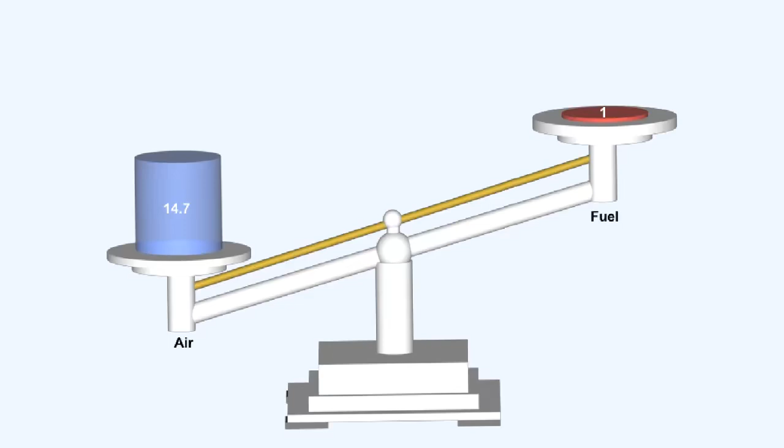This ratio is termed the stoichiometric or chemically correct ratio. At this ratio, all of the oxygen in the charge combines with all of the hydrogen and carbon during combustion. For the purposes of this lesson, we'll restrict our numerical definition of the chemically correct ratio to two significant figures. Thus, we'll specify 15:1 as the chemically correct ratio for air and gasoline.

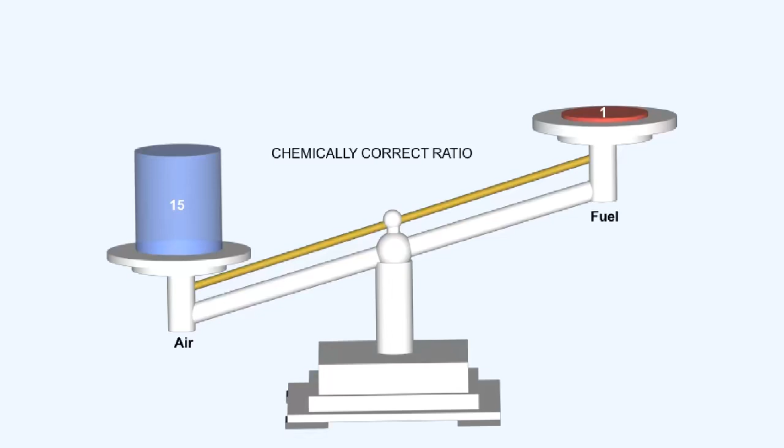It's important to remember that the chemically correct mixture does not give the best results in a piston engine, because the temperature of combustion is so high at this ratio that power can be lost through detonation.

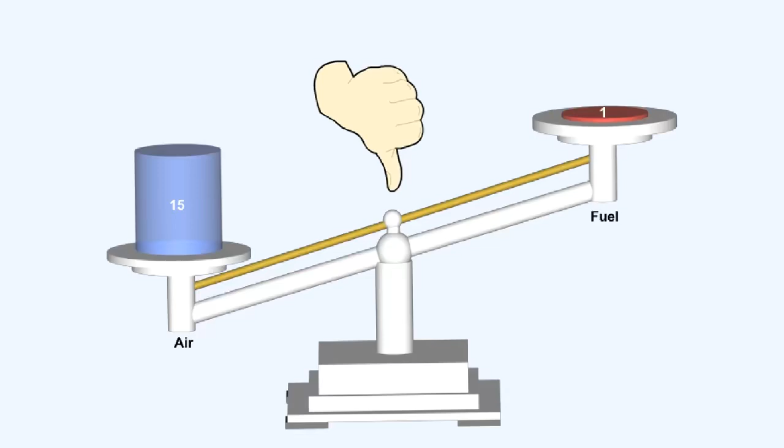In practice, particularly in a carburetor induction system, mixing of the air and fuel particles and their distribution is less than perfect. This results in some parts of the induction system having a richer mixture and others having a weaker mixture than the optimum strength.

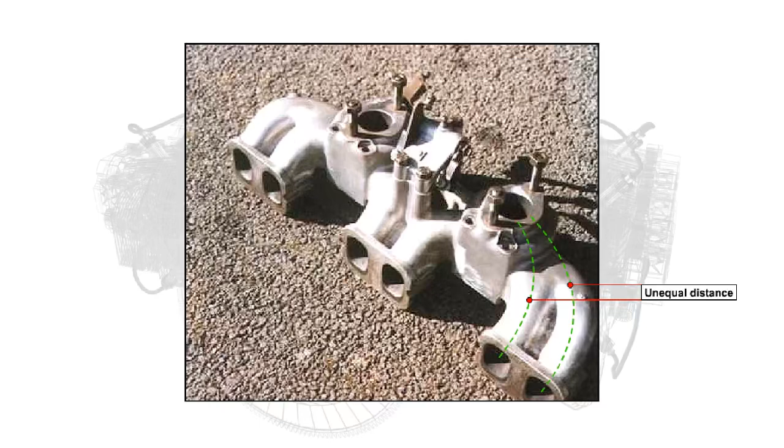This variation in mixture strength may even exist between one cylinder and another adjacent to it, as is evident in this example of a simple automotive twin carburetor induction system, where the difference in the distance that the air-fuel stream has to travel between the carburetor and, say, the number 1 and number 2 cylinders will have a quantifiable effect on performance.

Having a slightly rich mixture does not have much effect on power, since all of the oxygen is still consumed and the excess of fuel merely serves to slightly reduce the effective volumetric efficiency of the engine. In fact, the cooling effect of the evaporating fuel can to some extent be beneficial in cooling the charge temperature below the level where it might otherwise detonate.

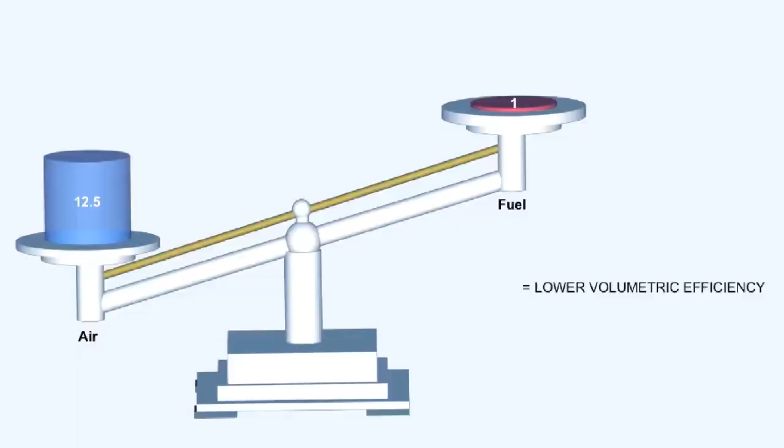Running the engine on a weak mixture, however, rapidly reduces power, since some of the inspired oxygen is not being utilized. The power reduction thus suffered is much greater than that which results from a slight richness of mixture.

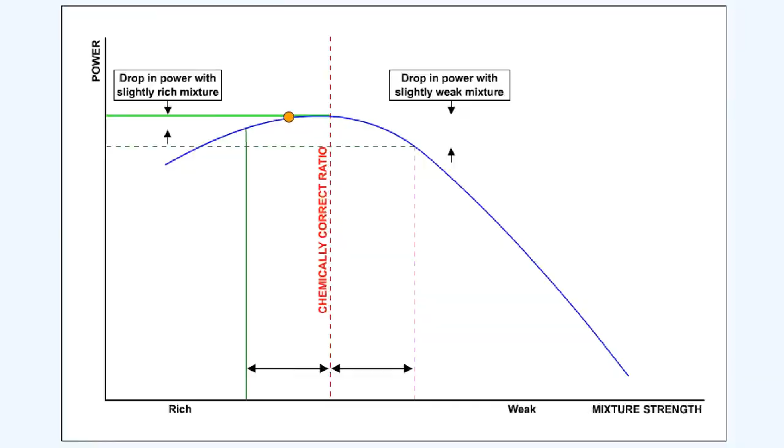It is, therefore, quite common to run aircraft engines which are fitted with carburetors, when maximum power rather than best fuel economy is the objective, at somewhat richer than the chemically correct mixture, for example about 12.5:1, to ensure that no cylinder is left running at severely reduced power from being unduly weak.

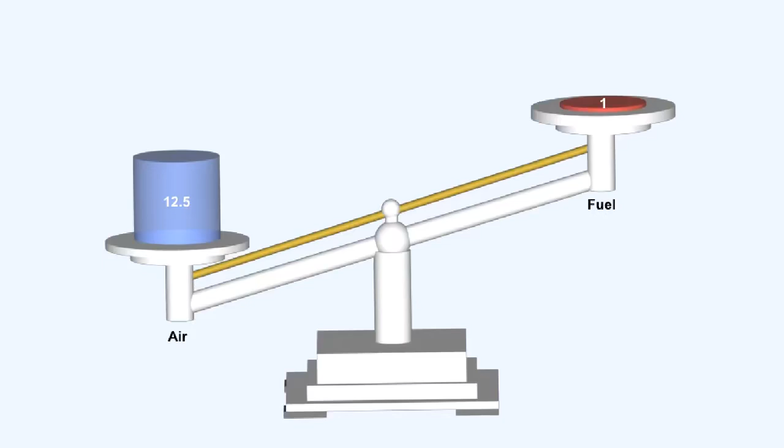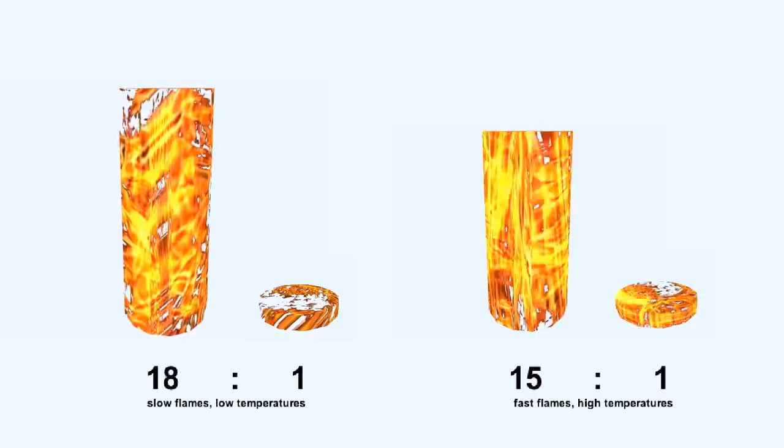A mixture which is weaker than the chemically correct ratio, besides burning at a lower temperature than that which would occur with the chemically correct ratio, also burns at a slower rate than the chemically correct ratio, because of the greater proportion of nitrogen in the cylinder.

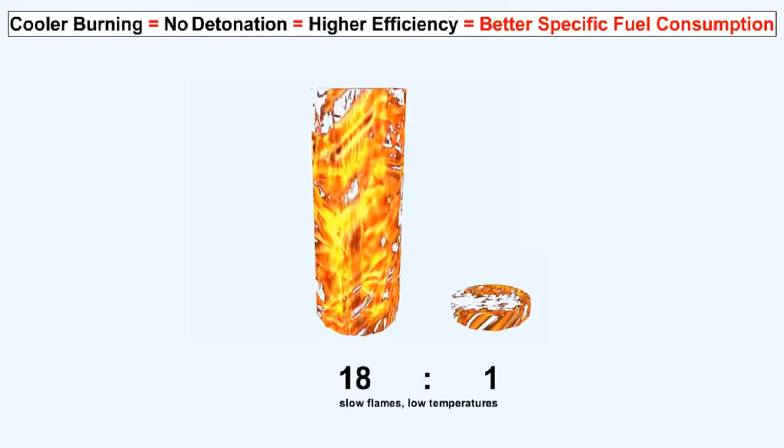Power output thus decreases as the mixture is weakened, but because of the increase in efficiency which results from cooler burning, and the associated decreased occurrence of detonation, the fall in power is proportionally less than the decrease in fuel consumption. Thus, the specific fuel consumption decreases as the mixture strength is weakened below 15:1.

For economical cruising at moderate power, air-fuel ratios of 18:1 may be used, an advance in the ignition timing being necessary to allow for the slower rate of combustion.

The current number of modern aircraft with the facility to vary the ignition timing in flight is limited. However, following the recent introduction of electronic engine control, a rise in this number is likely.

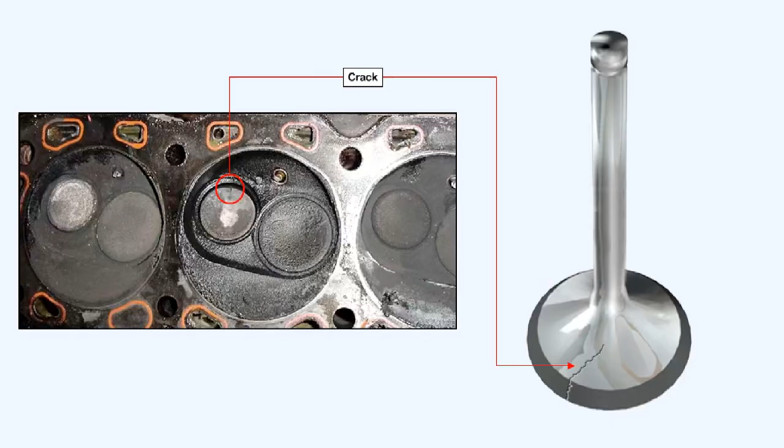With extremely weak mixtures, the gases may still be burning when the exhaust valve opens, exposing the valve to high temperatures which may cause the valve to crack or distort.

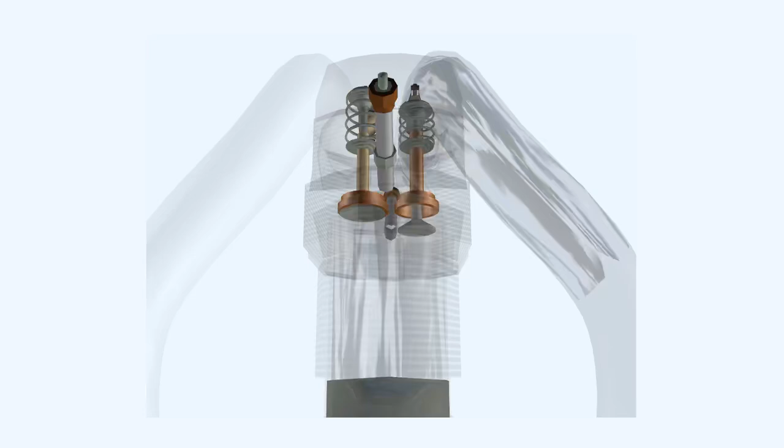As the inlet valve opens, the heat of the exhaust gases remaining in the cylinder may still be so high that it could ignite the mixture in the induction system, and popping back occurs through the induction manifold.

This slow burning also causes overheating, because a certain amount of the heat generated in combustion is not converted into work by expanding the gases in the cylinder as it should be. It therefore remains in the cylinder and has to be dissipated by the cooling system.

The first reason concerns the fact that fuel will only burn when it's vaporized and is mixed with air. When first starting, the engine will be cold, and there is little heat to assist the vaporizing process. Therefore, only the lightest fractions of the fuel will vaporize. To make sure that there is sufficient fuel vapor in the cylinders to support combustion, a rich mixture is therefore required.

The second reason concerns valve timing. As we've already learnt, the exhaust valve timing is given a certain amount of lag, so that full advantage can be taken of the considerable inertia of the gases at normal engine speeds to obtain efficient scavenging of the burnt gases, and to give impetus to the incoming charge. However, as engine speed reduces, the gas velocity falls, and more of the burnt gases remain in the cylinder, whilst at still lower speeds, such as idling speed, there is a tendency for exhaust gases to be sucked back into the cylinder by the descending piston before the exhaust valve closes. The consequent dilution of the induction gases is such that, to maintain smooth running, a rich mixture is required.

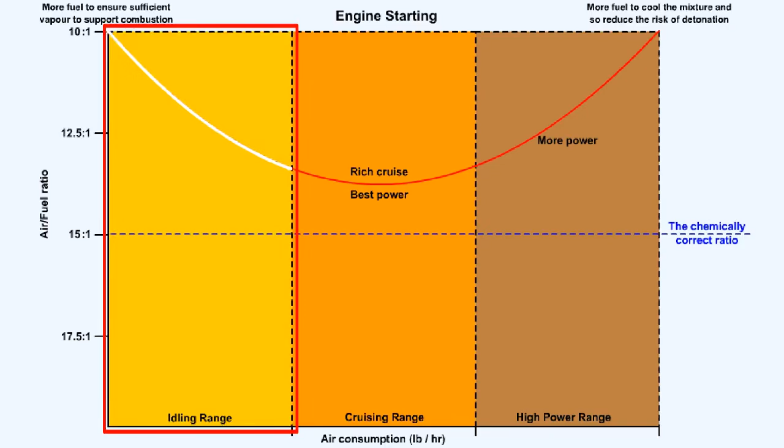The cruise portion of the diagram shows that this is really the only time during which the pilot has any choice in what mixture to set. If time is no object, then during cruising flight, only moderate power is required from the engine. Thus, an economy cruise setting of approximately 17.4 to 1 can be used. Fuel consumption will decrease accordingly.

On the other hand, if speed is of the essence, then a mixture setting which gives performance cruise power can be selected, say somewhere in the region of 14.4 to 1. The fuel consumption will of course rise, in some cases by as much as 20%. When higher power is required, for instance when climbing, the mixture is enriched to about 11 to 1. The extra fuel, in vaporizing, cools the mixture and reduces the tendency to detonate.

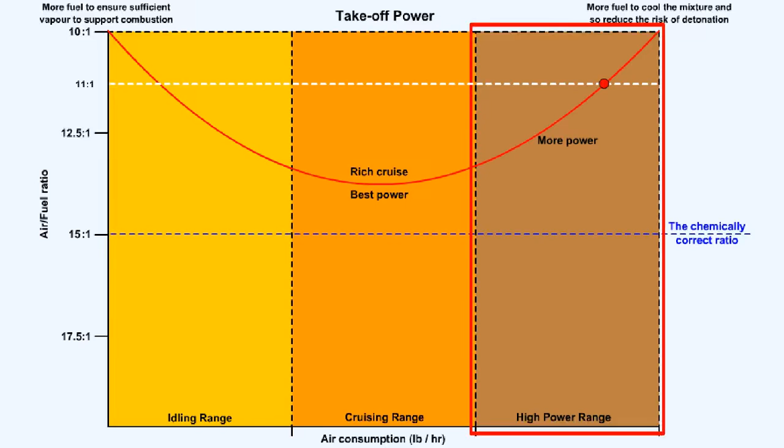When full power is selected for takeoff, the mixture must be enriched to about 10 to 1. Apart from the cooling effect, the excess fuel is wasted, as there is insufficient oxygen available for it to burn completely. The higher power results from a greater weight of charge induced in a given time, and not because of mixture enrichment. In practice, excess fuel vapor is not scavenged as vapor, because the oxygen is shared out to some extent, so that carbon monoxide is produced during combustion as well as carbon dioxide. With very rich mixtures, some of the carbon fails to combine with oxygen at all, and is exhausted as black smoke.

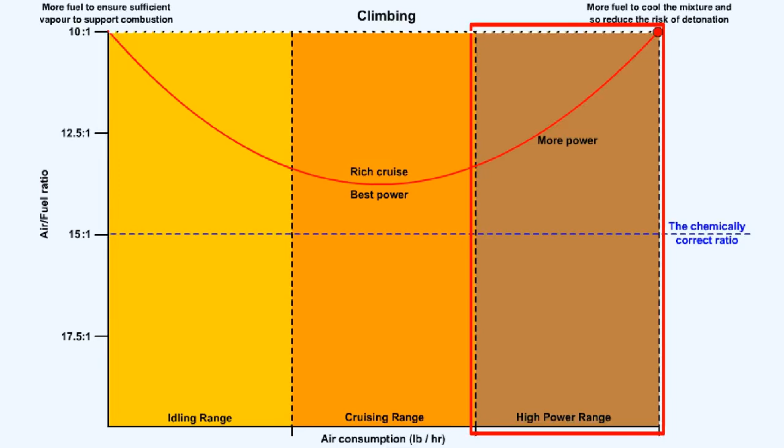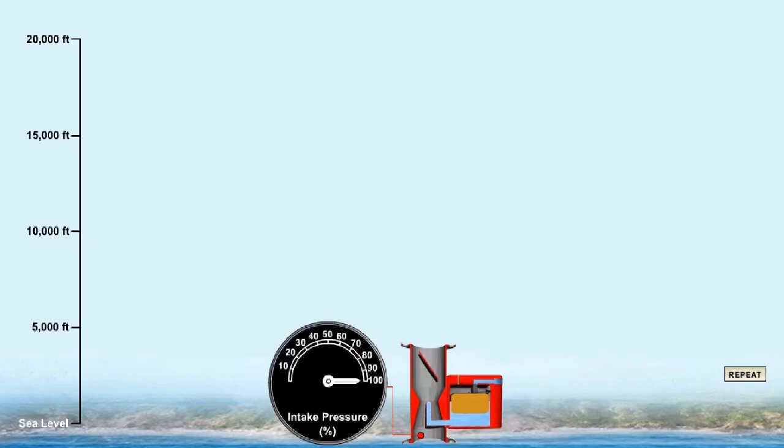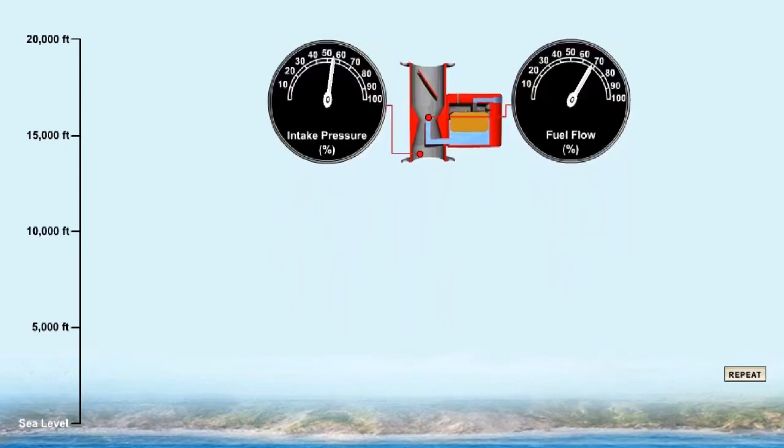Because the density of the air decreases with increase of altitude, as the aircraft altitude increases, the weight of air drawn into the cylinder decreases. For a given intake velocity, the pressure drop in the carburetor venturi will decrease as ambient density decreases. However, the fuel flow due to this pressure drop will not decrease by the same proportion, and so the mixture will become richer.

If we are to operate the engine efficiently when flying at altitude, then it becomes imperative that we have some method of defining and regulating the mixture strength. We'll look at two methods which can be used to maintain the correct mixture control.

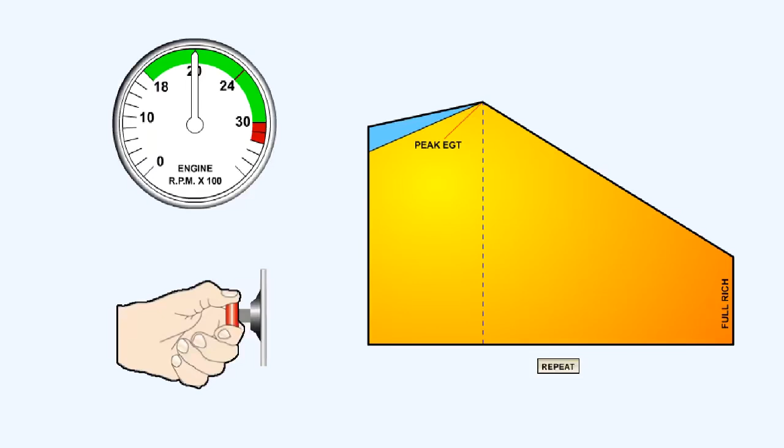The first method that we'll examine presumes some knowledge of the effects that mixture change will have on the engine. Bear in mind that as the mixture control is moved from fully rich to a weaker setting, the air-fuel ratio approaches the chemically correct value of approximately 15 to 1. At this ratio, all of the air and the fuel are consumed, and the heat released by combustion is at its maximum. More heat means more power. With a fixed-pitch propeller, the RPM will rise, and airspeed will increase as more power is produced.

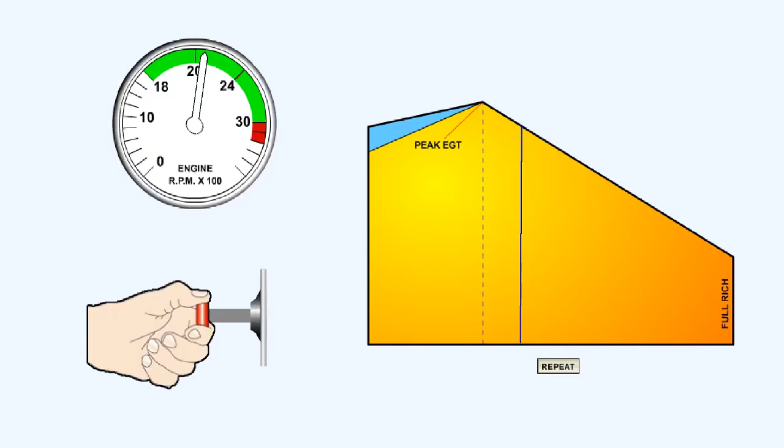If the mixture is weakened even more, the RPM will drop. Pushing the mixture control back to where the chemically correct mixture was found will bring the engine speed back up, but this cannot be maintained without risking the generation of detonation. To prevent this happening, the mixture control should be moved to a slightly richer position, when the RPM will fall slightly.

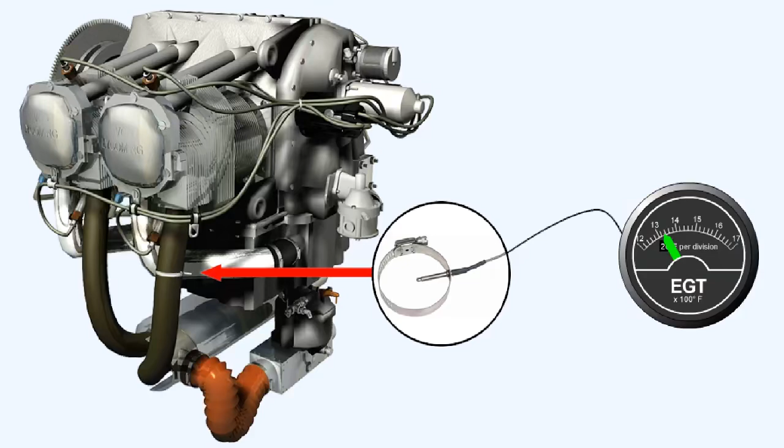The second method utilizes the exhaust gas temperature gauge. The exhaust gas temperature system is powered by a thermocouple, which is fitted into the exhaust pipe of the hottest cylinder on the engine. The thermocouple produces a voltage which is directly proportional to its temperature. The voltage is indicated on a gauge which is calibrated to show exhaust gas temperature.

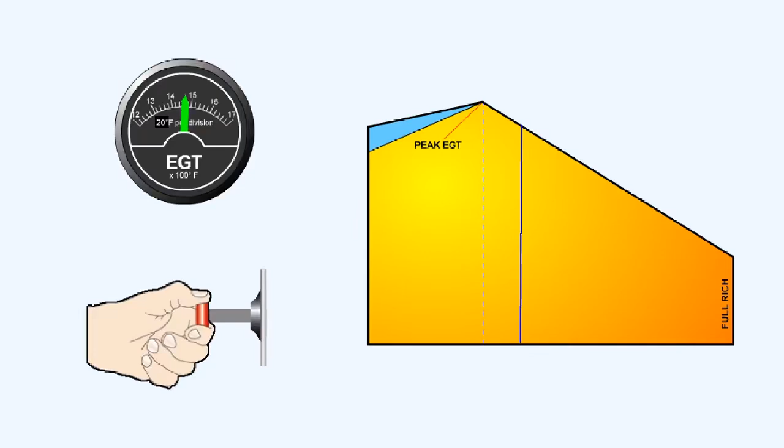If the mixture control is moved towards lean, the temperature will peak at the ratio of 15:1. It should be remembered that this ratio should not be used, as detonation can occur. The mixture control should then be moved from the peak exhaust gas temperature position towards rich, and the exhaust gas temperature will drop. The aircraft's flight manual will specify a temperature drop which will give the rich cruise setting. This concludes the lesson on mixture.